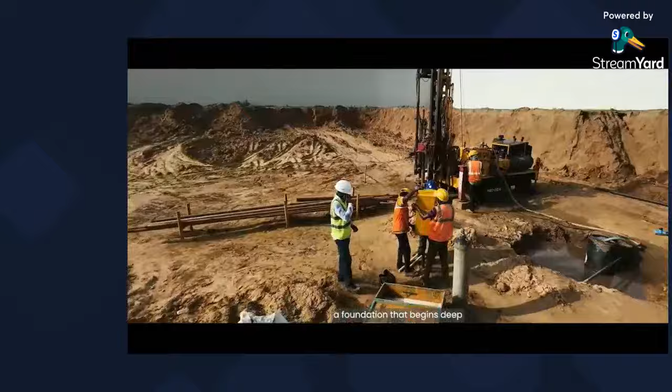Every metro line, every skyscraper, every bridge that connects lives rests on a silent foundation. A foundation that begins deep beneath the surface. And that's where we come in. Cengrs Geotechnica, smart geotechnics for better foundations.

Namaskar, my name is Sanjay Gupta. Right from 1971, I was employed in a job as a site engineer. Then I became a soil engineer, then senior engineer, and likewise. As a young, enthusiastic engineer with a passion in geotechnical engineering, I started as an entrepreneur and founded Cengrs, commonly known as Cengrs, that's Foundation Engineers. Cengrs is now 35 years young with a vision to make geotechnical practice a specialist engineering service. Cengrs has been instrumental in upgrading the codes of practice to improve geotechnical practice in society, with an effort to match international practices.

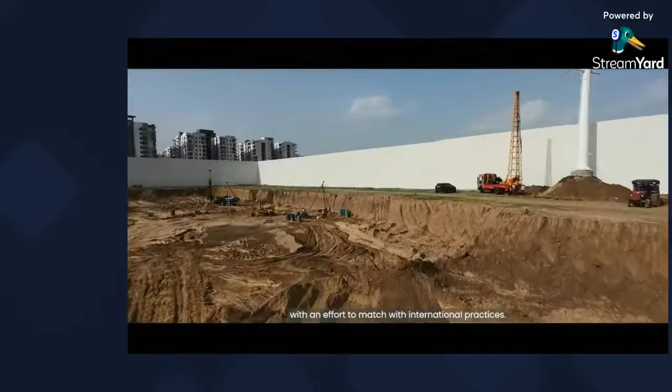Geotechnical engineering is a science, but its practice is an art. I always believe and say, be a part of the soil, feel the stresses, deform along with it, and the solution shall emerge within itself.

Cengrs was built on a commitment to generate authentic geotechnical data, maintaining technical integrity and a deep sense of purpose. Over 3.5 decades, we've partnered with India's most ambitious infrastructure projects, laying the groundwork, literally, working for a stronger tomorrow.

I'm Ravi Sundaram, Director of Cengrs Geotechnica Private Limited. At Cengrs, we are not just offering services, we are offering quality engineering. Our NABL accredited lab, our ISO certifications, our advanced testing equipment. From soil investigation to foundation testing, each step is backed by thorough and rigorous quality assurance so as to ensure the quality of data is trustworthy.

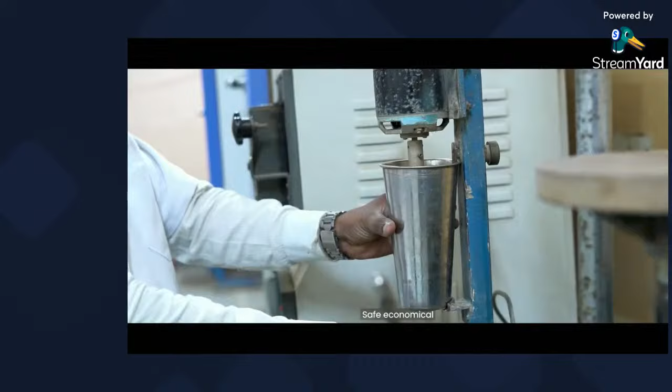Over the last 35 years, we have been building this trust with our clients and in professional circles. Be it a metro line, a smart city, or a high-rise, our detailed, data-driven approach ensures safe, economical, and sustainable construction. It's not just about what's underground, it's about what that foundation enables above the ground.

Behind every data point is a human being. Our people are the foundation of Cengrs. From seasoned engineers to young interns, every mind here is tuned to solve challenges and deliver value. We don't just work for our clients, we test today for tomorrow's progress. And as the nation progresses, we take pride in our contributions to the projects executed and our humble achievements.

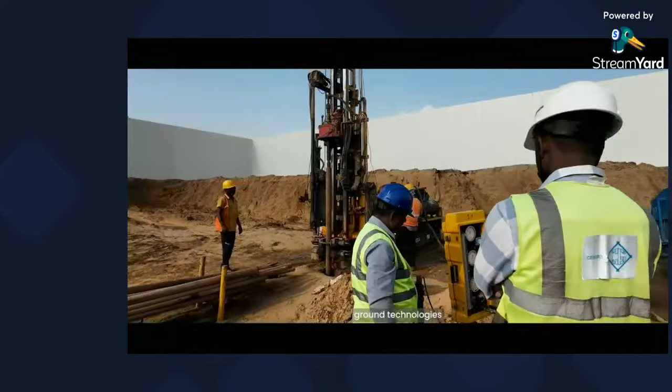Hello, I'm Saurabh Gupta, Director at Cengrs Geotechnica Private Limited. As the market leader, we have decided to transform the geotechnical engineering industry in India and bring it to world-class standards. To do this, we have implemented a system-driven approach so we can deliver consistent quality and on-time delivery for our customers. We are the first ones to bring in the latest ground technologies such as cone penetration test, pressure meter test, cross-hole seismic tests, etc., so we can unlock value and mitigate project risk. As always, smart geotechnics for better foundations.

From the surface, it's just soil. But to us, it's the beginning of possibility. Cengrs Geotechnica, smart geotechnics for better foundations.

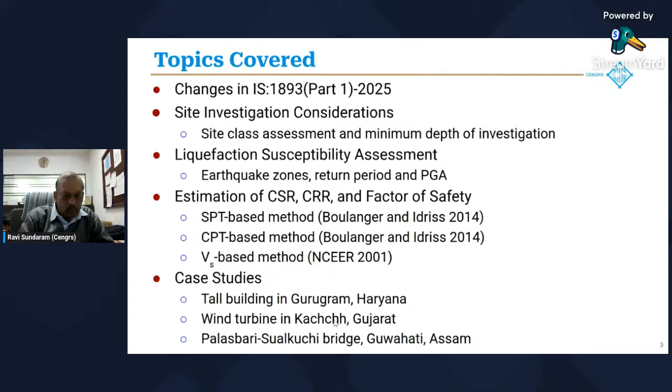I would start by introducing Cengrs to you. We have been in the field of geotechnical consultancy, investigations, and all since 1990. We have over 150 members team. We have over the years published over 85 papers, done up 200 to 250 projects annually, and we are close to 7,000 projects in the Indian subcontinent with over 1,500 satisfied customers.

So our primary activities include geotechnical investigation, geophysical surveys, geotechnical laboratory testing, engineering consultancy, topographic and hydrogeological surveys, foundation testing, etc. So our intent is to provide complete solutions, 360-degree solution as we call them.

So as a geotechnical investigation agency, we provide accurate data, reliable data for foundation analysis. We have in-house strength and capability for performing foundation analysis, as well as extensive experience to do these studies. Foundation testing, quality assurance, and quality control.

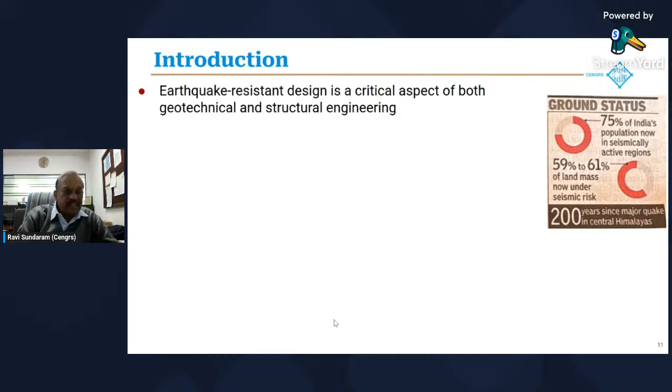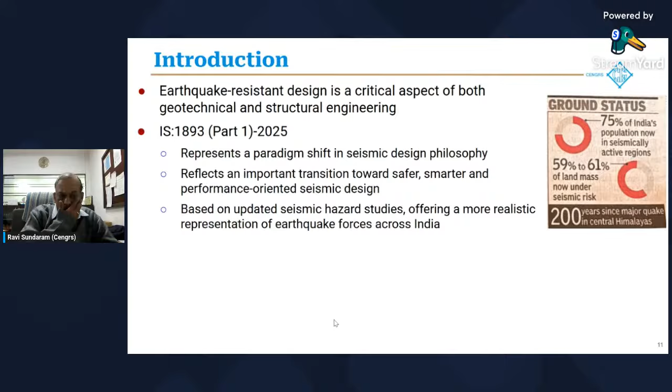It has been 200 years since any major earthquake has occurred in the central Himalayas. As a result, we have to be aware that there could be earthquakes anytime. So this code represents a paradigm shift in the seismic design philosophy. It reflects an important transition towards safer, smarter, and performance-oriented seismic design. So based on the updated seismic hazard studies, it offers a more realistic representation of the earthquake forces across India. It aligns India to the global practices and the practices which are used internationally.

So we can call this a responsible seismic design. Don't treat it as an over design. Sometimes people do tend to think that since the requirements have increased, so it is an over design. The intent is not to make everything stronger and safer, but to ensure that essential buildings remain functional even after major earthquakes. It adds an extra safety net, equipping buildings to better withstand the seismic events through strengthened provisions. So you can make sure that even if there is a major seismic event, your structure is better ready to function even after the major earthquakes.

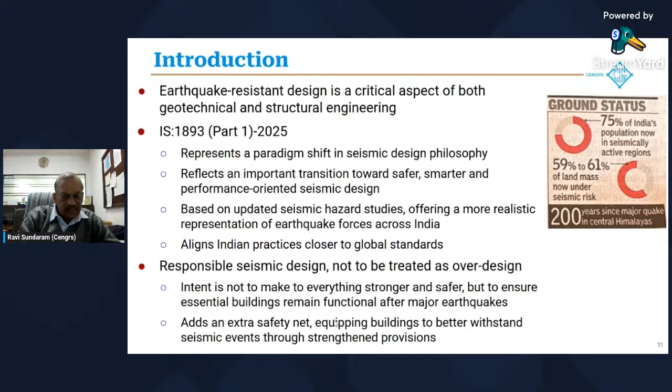So if we were to look at the key highlights, a new earthquake zone map has been released. This is a revised and more accurate seismic zone map, introduced using advanced probabilistic hazard assessment, PSHA as it is called. The minimum geotechnical investigation depth has been defined. It specifies that the minimum depth of investigation should be 2 times the width of the foundations for mats or raft foundations, spread footings, and as far as pile groups go, the length of the pile plus 2 times the width of the group.

So soil exploration must go deeper. A generic 10 or 15 meter deep boreholes won't suffice anymore. So investment in good geotechnical investigation is now important.

So the site classification is now based on VS, not on N values. SPT-based classification has been replaced by shear wave velocity classification. Sites are classified A to E. This means geophysical testing for shear wave velocity determination has become mandatory. You could do the shear wave velocity determination using seismic cone penetration test, cross-hole seismic test, or downhole seismic test. So this is now required.

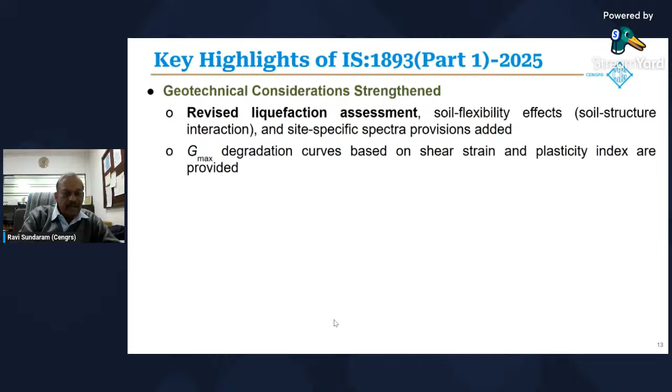Now geotechnical considerations have been strengthened. There is a revised liquefaction assessment, soil flexibility effects, that is the soil structure interaction, and site-specific spectra provisions. Now these have been added. The Gmax degradation curves based on shear strain and plasticity index are provided.

You have a requirement for site-specific earthquake hazard assessment. This should be done for the project site when your structures rest on site class A to D with design return period of 2,475 years, or in site class E for all cases.

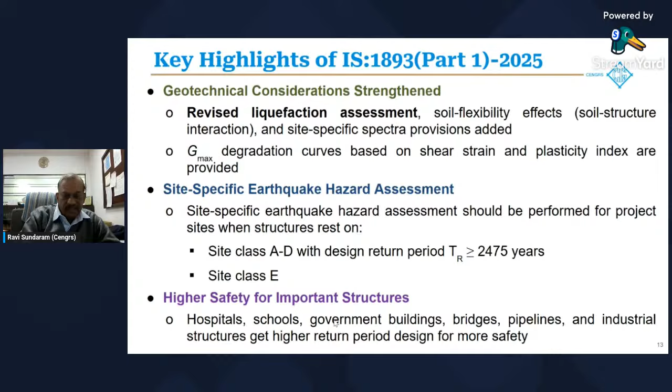And higher importance has been given, higher safety factor for important structures. So hospitals, schools, government buildings, bridges, pipelines, industrial structures get higher return period, so that it has to be designed more safely.

Let's make a comparison of 2016 code versus 2025. In 2016, shear wave velocity measurement was optional. Now it is mandatory for specific special critical structures in all earthquake zones and important structures in zone 4, 5, and 6.

The N60-VS correlation may be used only for normal structures in all earthquake zones and important structures in zones 2 and 3. Otherwise, you have to measure the shear wave velocity.

The site class assessment was based on a weighted average of the SPT values in the 2016 code. Now you have to take a weighted average of shear wave velocity within the depth of influence of the foundation, which is 2B below the foundation.

The 2016 code had 4 zones: 2, 3, 4, and 5. Now the zoning map has been updated to 5 zones with a new zone 6 being introduced.

The earthquake magnitude in the 2016 code does not directly specify what should be the magnitude of earthquake to be considered for each zone, whereas now we have very clear definitions. For zone 2, you use 6, for zone 3, you use 6.5, and so on, and for zone 6, you are going to use 8 on the Richter scale.

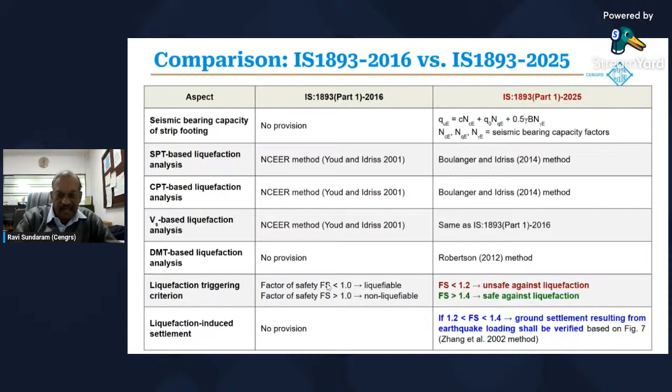The figure 7 of the new code is based on the Zhang et al. 2002 method, so this has to be done.

If we were to look at the site investigation considerations: for normal structures in earthquake zones 2 to 6, you can use corrected SPT values and VS profiles if available. For important structures in zones 2 and 3, you may use VS profiles if available, and they are preferred over the corrected N values. But in zones 4 to 6, you need VS from geophysical investigation.

Similarly, for critical and special structures, VS is required from geophysical investigations. A minimum depth of investigation, this is very important.

Now, the new code says that if B is the smaller plan dimension of the foundation, for mat foundations or raft foundations, your depth of investigation should be 2B below the foundation. For piles, if it's a single pile, it is depth of pile plus twice the diameter of the pile. If it's a pile group, which would normally be the case, then you must take the plan area of the pile group, the smaller dimension, and twice that dimension you have to investigate below the pile tip.

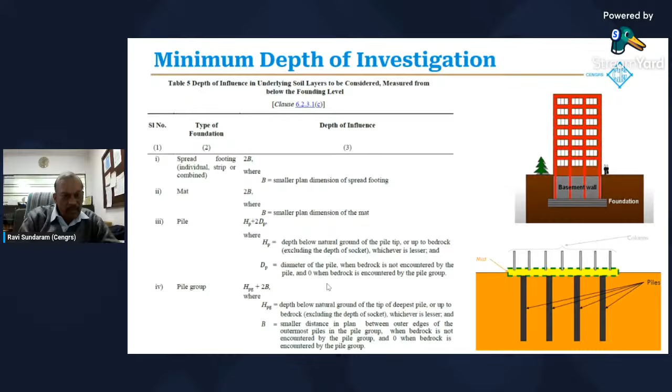So now your site class assessment. There is a correlation given in the code for computing VS on the basis of N values. But this, as I told you, you can use it only in zones 2 and 3, or for normal structures in zone 4 to 6. Otherwise, you must be doing the VS assessment.

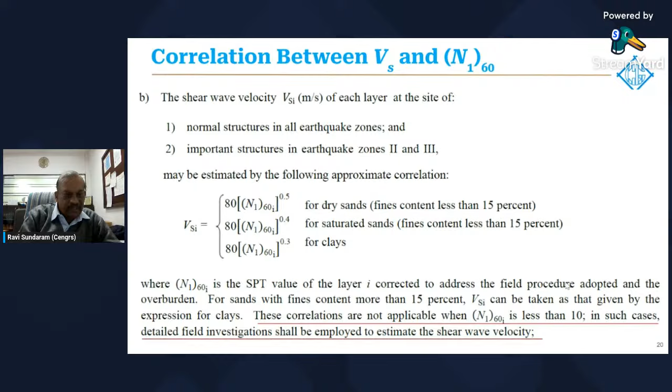The classification A, B, C, D, E is based on the shear wave velocity, which is given in this table. So approximate shear wave velocity you can estimate based on N values, but only under limited conditions. If you were to look at the equivalent N values for the various classes: site class A, you have N values more than 100, same for class B. For class C, dry sands, it is 20 to 100, more than 43 for saturated sands. Class D, you can have lower N values - dry sands 5 to 20 and saturated sands 8 to 43, and clays 15 to 100. But where the N values are less than 5 to 15, it would be class E soils. So the N60-derived VS is permitted only under limited conditions in zone 2 and 3.

Direct measurements of VS are always preferred, as explicitly stated in the code. The N60 to VS correlation is not applicable when N is less than 10. In such case, VS has to be measured. Unrealistically high N60 values for stiff to hard clays may be due to the empirical correlation, so be aware of that.

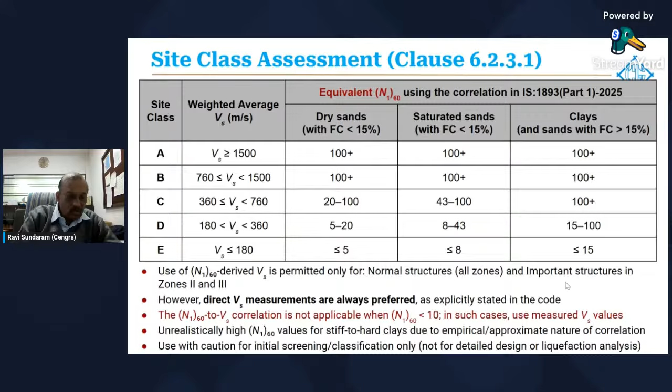There are also the non-invasive techniques like MASW, SASW, seismic refraction, passive surface waves, and various others like REMI and all that. Many of these are very much used in the country, and you may prefer, particularly for deep investigations, to do cross-hole seismic test. If you're not getting refusal, you could go with seismic cone penetration test. MASW, SASW, of course, they are very useful tests.

So just a brief look at cross-hole seismic test. So you have 3 boreholes, and in one borehole you create the impact, and the adjoining 2 boreholes you receive the waves. This way you are able to get a continuous profile of P wave velocity and shear wave velocities, and thus determine the various dynamic parameters. And then you can do your site class determination, your seismic analysis, static analysis, etc.

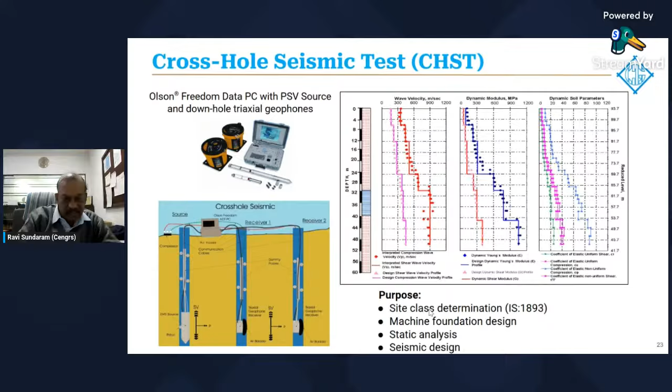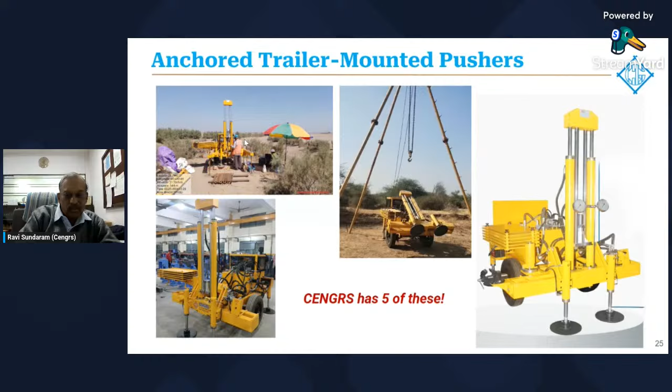So this is the equipment, the seismic cone penetration test pushers. We have been using this quite extensively. We have 5 of these rigs, and this is hydraulically operated, a trailer mounted rig. So the advantage is that it's quite fast. You can do 30 meters in just less than half an hour.

In granular soil, you get continuous and near continuous data, accurate, very reliable, enhanced, good quality data, with very good repeatability. It's versatile for the wide spectrum of CPT-based geotechnical parameters and for foundation analysis. In soft soils, you can even go up to 100 meters, but even in medium to stiff soils, you could probably go 40 meters or even more. It's very reliable, repetitive data, and irrespective of who does the test, you get similar results because it is digital data acquisition.

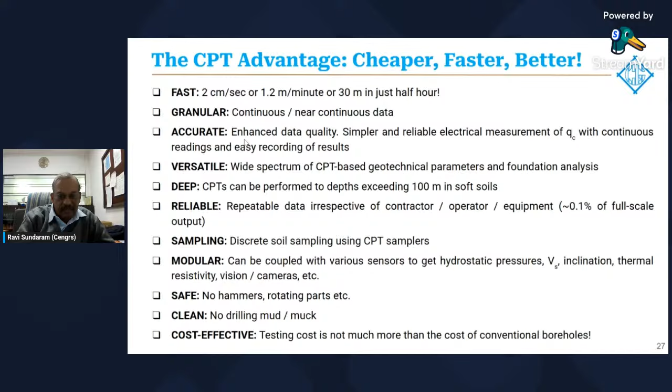You could do sampling with discrete soil sampling using CPT samplers, also called the MOSTAP sampler. It can be coupled with various sensors to get hydrostatic pressure, shear wave velocity, inclination, thermal resistivity, vision cameras, etc. No hammers or rotating parts. It's clean, no drilling mud. Cost effective. Testing is not much more expensive than conventional boreholes, so it's almost the same cost.

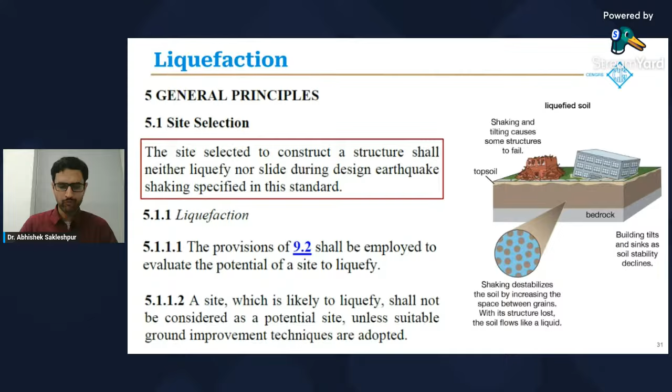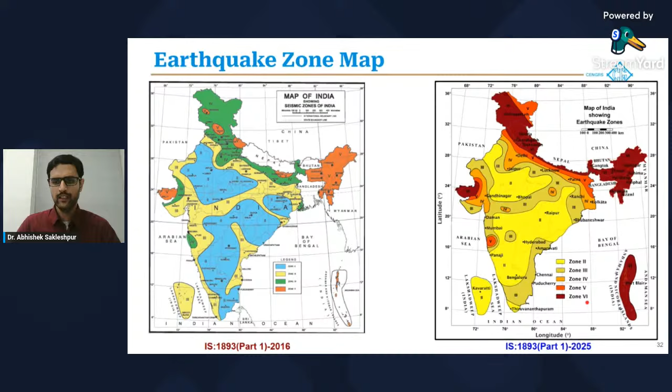Now, the states that fall in seismic zone 6 include Jammu and Kashmir, except the northeastern part of the state, Himachal Pradesh except the southern part, Uttarakhand, all the northeastern states - Sikkim, Arunachal Pradesh, Assam, Nagaland, Manipur, Mizoram, Tripura, Meghalaya - Western Gujarat, particularly Bhuj and Kutch, and finally the Andaman and Nicobar Islands.

So it's important to know the risk, be prepared, and stay safe. The way we can do that is by following updated building codes, conducting site assessments, earthquake preparedness, and community awareness and training.

Now, in terms of the earthquake magnitude on the Richter scale, for zone 2 it starts from a value of 6.0, increasing up to a magnitude of 8.0 for earthquake zone 6.

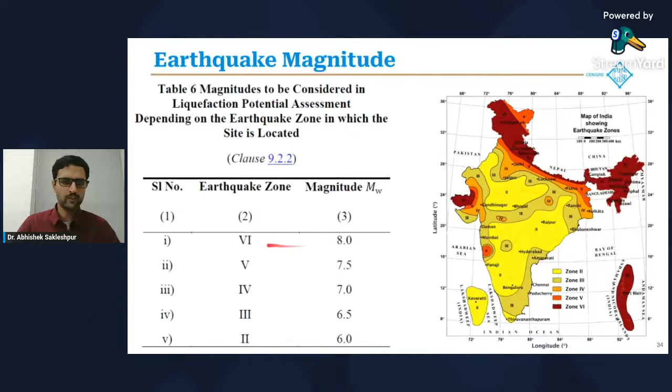When we do the liquefaction susceptibility assessment, one of the things we need to consider is the category of the structure. The IS code defines 4 categories of structures: normal structures, important structures, critical structures, and special structures. This classification depends on the relative severity of the negative consequences - that is, loss of life and livestock, loss of property, and harm to the natural environment - in the event of failure of the structure.

Apart from IS 1893 Part 1, there are other parts going from Part 2 to Part 11, and each of these parts focuses on different types of structures, such as liquid retaining structures, bridges, industrial structures, buildings, base isolated buildings, long distance pipelines, steel towers, coastal structures, tunnels, and earthen embankments and earth retaining structures.

Now, in order to determine the peak ground acceleration, we need to know what is the design return period. In the new IS code, there are 2 tables to estimate the design return period.

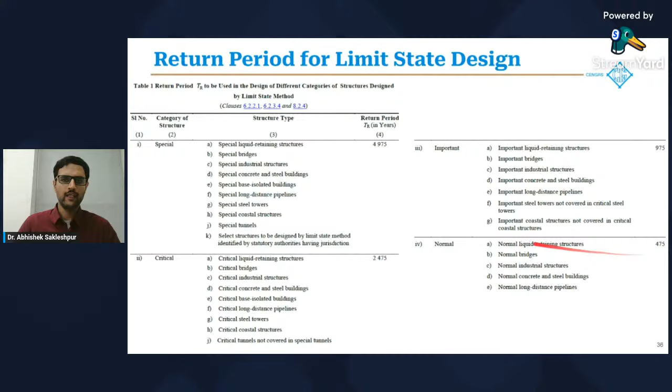Table 1 that you see on the slide here is the return period to be used in the design of different categories of structures that are designed by the limit state method. You can see in the table, depending on whether it's a special structure going all the way down to a normal structure, the design return period is different. So for a normal structure, it's 475 years, and as you go to a special structure, the design return period increases to 4,975 years.

Table number 2 is for the design of different categories of structures by the working stress method. The return periods in this table are lower compared to the limit state method, ranging from 175 years for normal structures up to 975 years for special structures.

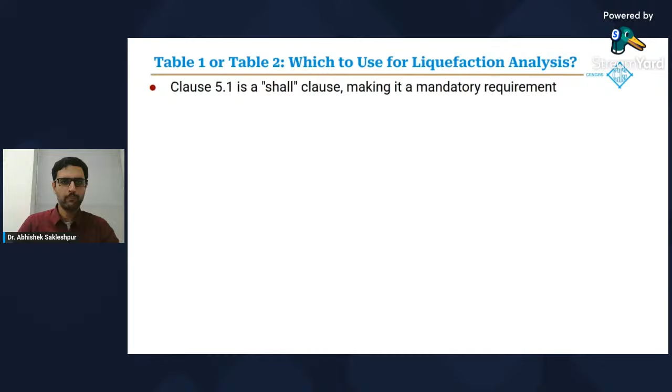A question that often comes up is which table should we use for liquefaction analysis - table 1 or table 2? If we refer back to clause 5.1 that you saw earlier, this clause is a 'shall' clause, making it a mandatory requirement. To repeat that clause, it says that the site shall neither liquefy nor slide during the design earthquake shaking. What that means is basically the structure must not collapse under the design ground shaking.

Now, if we choose to use table 2 for liquefaction susceptibility analysis, there is an incompatibility because although the code directs working stress method designers to table 2 for structural design and structural member proportioning, for liquefaction analysis the higher hazard levels in table 1 should be prioritized. This is because liquefaction is a geotechnical ultimate limit state that leads to collapse of the entire structure, and a site may pass table 2 shaking but could liquefy under the return periods in table 1, which would violate clause 5.1.

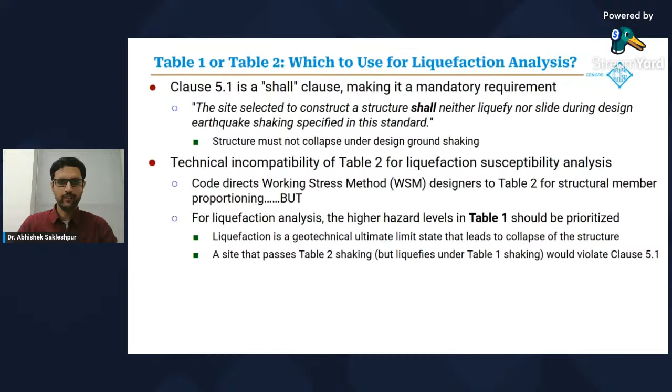So what is your way forward? Use your table 1 return periods, which represent the 475 year to the 4,975 year collapse prevention level, so that the site will remain stable under the intensity of the design earthquake shaking. The site will be robust enough to handle the design level shaking, regardless of whether the superstructure is designed using working stress method or limit state method.

So to summarize: for working stress method structural design, use table 2 to get the design return periods. For limit state method design of structures and liquefaction susceptibility assessment, use the return periods given in table 1. By doing so, we ensure that we do not violate the mandatory 'shall not liquefy' provision of clause 5.1, making our design fully consistent with the safety objectives of the IS 1893 (Part 1)-2025 code.

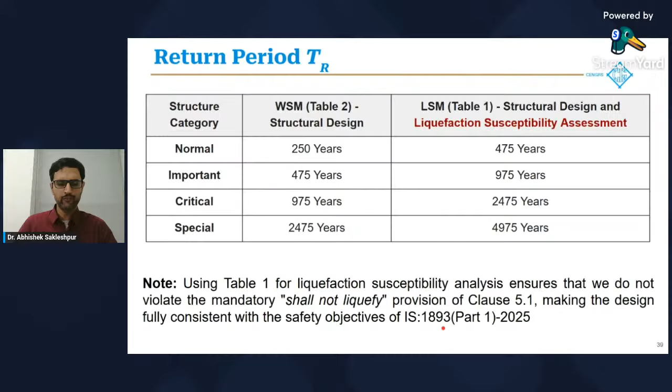So let's look at a few cases. If we take buildings, for example, buildings have a separate part, which is part 5 of the IS 1893 code. Nowadays in India we see a lot of tall buildings and high-rise residential towers coming up. Residential or commercial buildings with occupancy more than 100 people, or tall buildings, are classified as important buildings according to part 5 of the IS 1893 code. The design return period for liquefaction susceptibility analysis is 975 years.

Similarly, for bridges, which are covered in part 3 of the IS 1893 code, a river bridge or flyover bridges inside cities, or bridges on national and state highways, fall under the category of important bridges. However, if you have a long bridge more than 1 kilometer in length across perennial rivers and creeks, or bridges for which alternative routes are not available, these are classified as critical bridges according to the IS code. So we choose the design return period accordingly.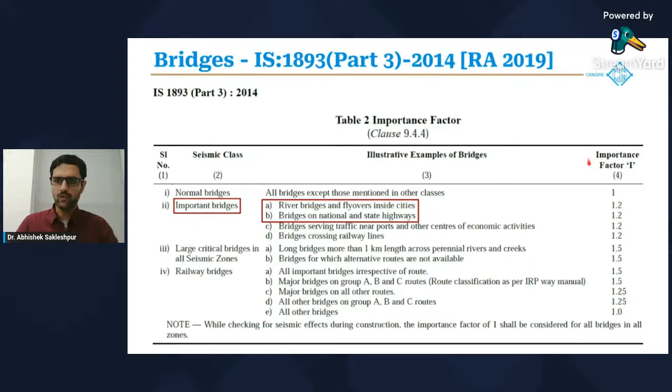Now in this table, you can also see a column with the importance factor. So what is this importance factor? It's important to note that the importance factor is not used to calculate the PGA for liquefaction susceptibility analysis. This importance factor is a structural parameter used to determine the design earthquake force for the structural elements themselves.

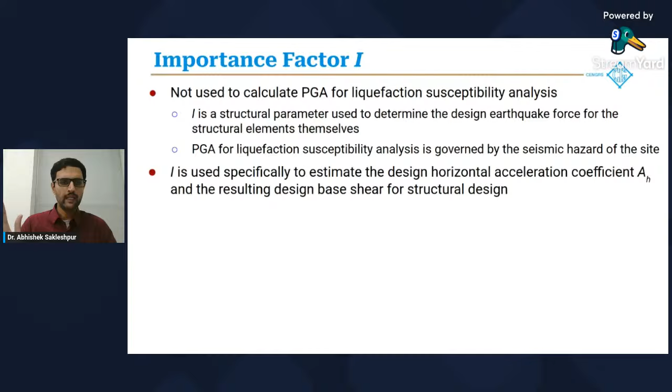Whereas the PGA for liquefaction susceptibility analysis is governed by the seismic hazard of the site, the importance factor I is used specifically to estimate the design horizontal acceleration coefficient and the resulting design base shear for structural design. It accounts for the functional use of the structure and the consequences of its failure. For example, lifeline infrastructure such as hospitals or major bridges require higher design forces, and they are given a higher importance factor.

So to summarize, for liquefaction analysis the primary seismic parameter is the peak ground acceleration, which is based on the zone factor for a specific design return period TR, and the importance factor is not used here. Whereas for structural design, the primary seismic parameter is the design base shear, which depends on the zone factor, the importance factor, and a response reduction factor R.

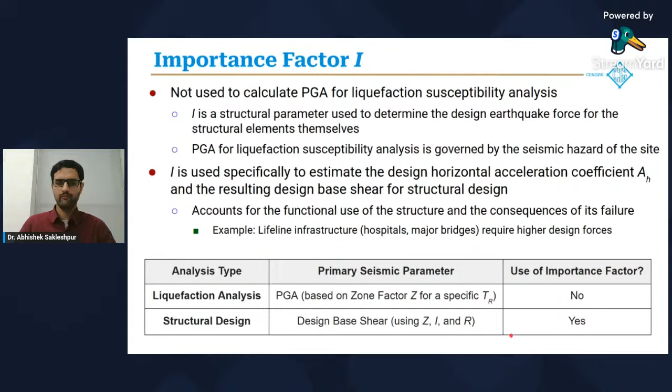So once you know the earthquake zone, that is zone 2 to zone 6, and your design return period, we can use table 3 of the IS code to obtain the peak ground acceleration. As an example, if we are in Delhi NCR, which falls under earthquake zone 4, and we take a tall building with a design return period of 975 years, then the peak ground acceleration is 0.28 g.

This table summarizes the earthquake magnitudes and PGA for a few select cities in India. If we look at Chennai, for example, in the 2016 code, it was in zone 3 with magnitude 6.5, PGA 0.16g. In the 2025 code, it falls in the same zone, same earthquake magnitude, but the PGA ranges from 0.13 to 0.33, depending on the design return period.

Kolkata, on the other hand, has been upgraded from zone 3 to zone 4 in the new IS code, and so the PGA values are also higher. Delhi NCR remains in zone 4 in the new IS code, with PGA values depending on the design return period. Now, the new zone 6 that we saw earlier includes Bhuj and Guwahati, which now have much higher design earthquake magnitudes and higher values of PGA, depending on the return period.

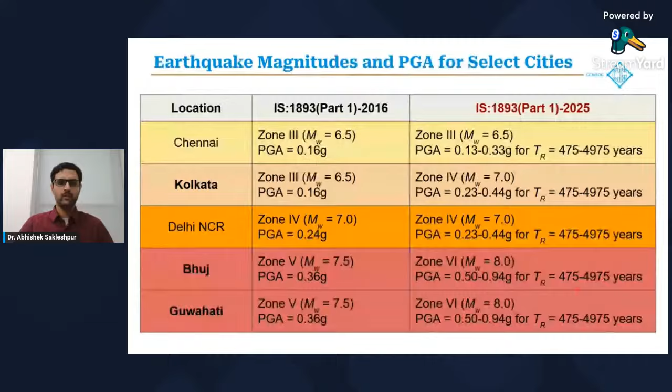So let's move to estimation of cyclic stress ratio, CSR, and factor of safety. I'll briefly go over the following slides in the interest of time, but the equations are extensively covered in the IS code. Cyclic stress ratio represents the seismic demand, and it depends on the peak ground acceleration, the vertical in situ total and effective stresses, and the stress reduction coefficient RD. The stress reduction coefficient takes into account the earthquake magnitude M.

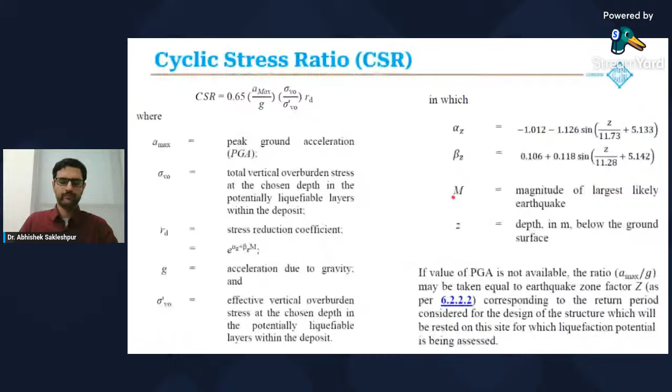Now, once you have the cyclic stress ratio, we then need to estimate the cyclic resistance ratio, which represents the resistance to liquefaction. CRR is equal to the value of CRR for a 7.5 magnitude earthquake under a vertical effective stress of 100 kPa, multiplied by the magnitude scaling factor and K-sigma, which is an overburden stress correction factor. Depending on whether we use the standard penetration test SPT, the cone penetration test CPTu, or shear wave velocity, we estimate the CRR for a 7.5 magnitude earthquake.

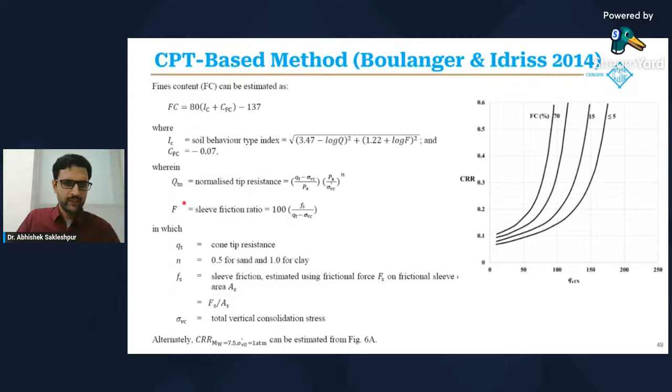The equation to calculate the fines content is given here at the top of the slide. This equation for the fines content has the soil behavior type index IC, which depends on your normalized cone resistance and the normalized friction ratio. It also has a fitting parameter CFC, and the IS code suggests a default value of minus 0.07 for this parameter. The other equations on the slide are for the normalized cone resistance and the normalized friction ratio.

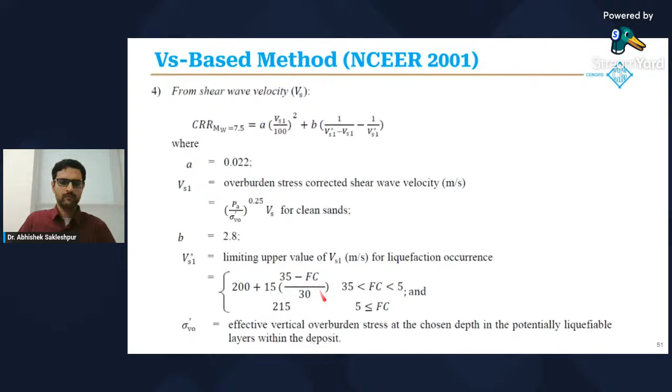Now, the factor of safety against liquefaction is the ratio of CRR to the CSR. As Ravi sir mentioned previously, if the factor of safety against liquefaction is less than 1.2, the soil layer shall be considered unsafe against liquefaction. If it's more than 1.4, the soil layer may be considered safe. Between 1.2 and 1.4, the resulting liquefaction-induced settlement should be verified based on figure 7 of the IS code.

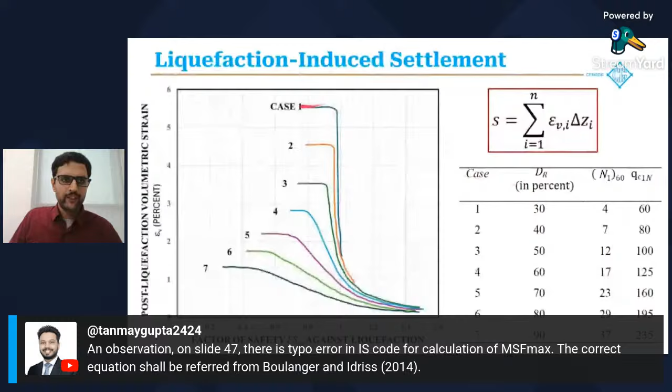Case number 1 would lead to higher post-liquefaction volumetric strains as expected, and as you go down to case number 7, you have lower post-liquefaction volumetric strain. Once you get the epsilon V, you have to multiply that with the thickness of the soil layer, and if you then take the summation of this across the zone of influence of the foundation, you then get the total liquefaction-induced settlement.

So let's look at 3 case studies to illustrate the application of the provisions in the new IS code.

The first case study is a tall building in Gurgaon, Haryana. This tall building includes 3 high-end towers, which are 140 meters in height. Each tower has 4 basements for parking and associated services. In addition to the 3 high-end towers, we have 4 low-rise blocks with 4 basements and 7 floors each.

The plot area is approximately 10 acres, and you can see an architect's visualization of the towers in the figure here. The scope of work in this project included 9 boreholes to 65-meter depth, 8 boreholes to 35-meter depth, 3 SPT analyzer tests for SPT energy measurement, 18 CPTUs to 30-meter depth, 3 seismic cone penetration tests to 30-meter depth, and also pressure meter tests in 3 boreholes to 65-meter depth. This would represent what we call a gold-level geotechnical investigation for accurate site characterization and enhanced liquefaction susceptibility assessment and foundation design.

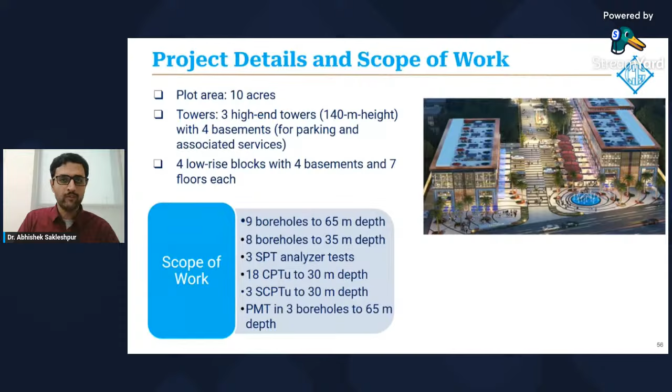This is a plan of the field investigation. You can see the 3 towers here in plan view and the layout of the boreholes, CPTUs, seismic CPTUs, and pressure meter tests. On the right-hand side are a few photographs of the field work in progress. For this presentation, we'll focus on tower number 3.

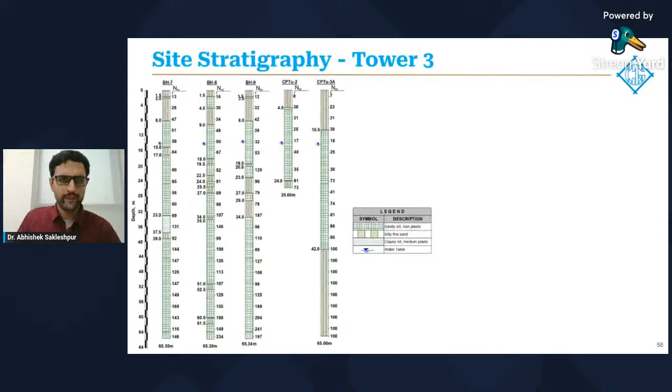Here we can see the summary profiles of the site from boreholes and CPTu interpreted soil profiles. Basically the soil profile consists of silty fine sand from the existing ground level to about 7.5 meter depth. This is underlain by sandy silt of low plasticity to the final explored depth of 65 meters. Groundwater was met at a depth of about 13 to 14 meters at the time of the field investigation.

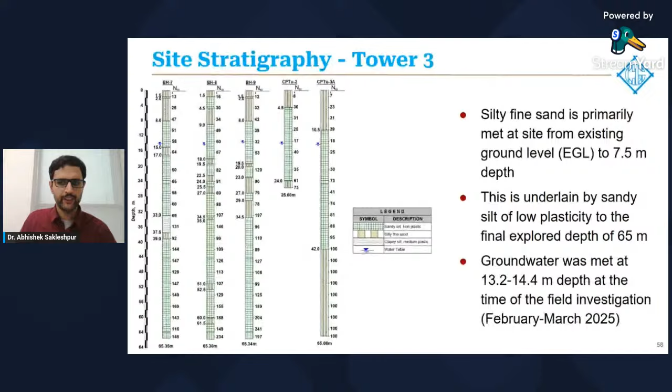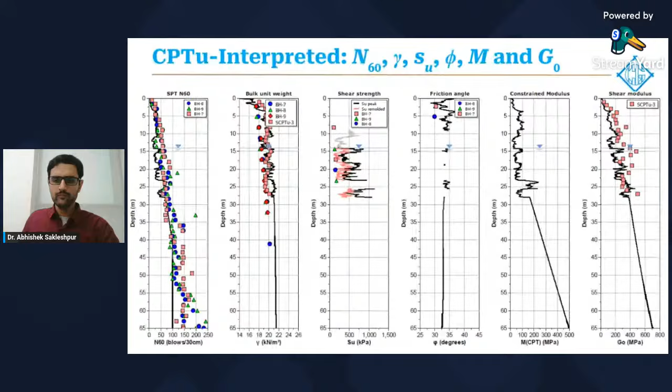It indicates the presence of natural cementation or microstructure in the soil profile. And this is a direct consequence of the higher values of shear wave velocity that we obtained from the seismic cone penetration test compared to CPT interpreted correlations.

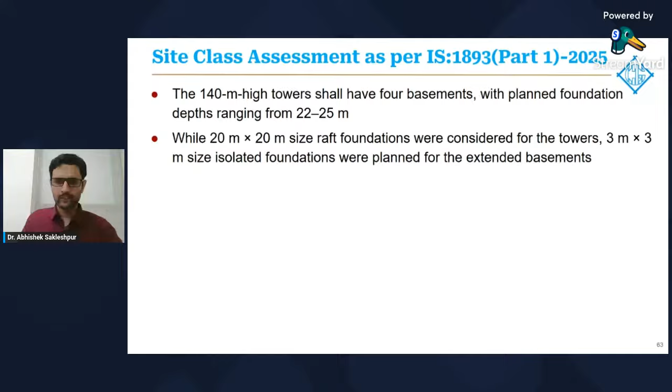So based on this weighted average shear wave velocity, the soil at the site is classified as site class C, according to table 4 of the IS 1893 code.

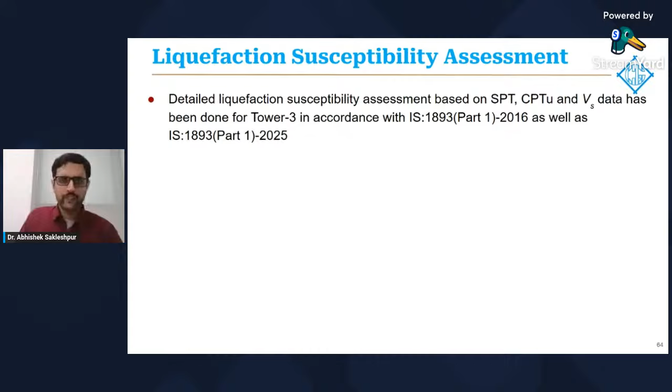Liquefaction susceptibility assessment: we had done detailed liquefaction susceptibility assessment using CPT, SPT, and VS data. The groundwater level during our investigation was actually influenced by dewatering.

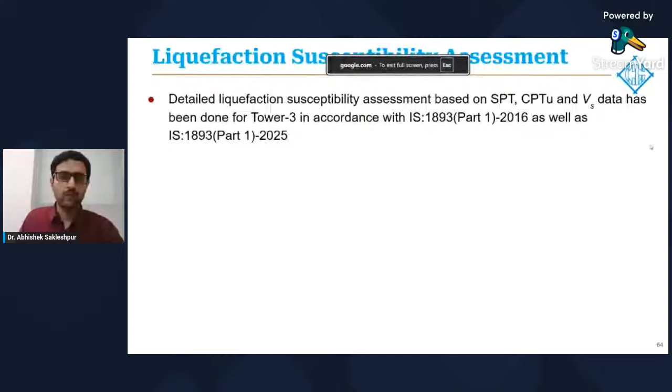Yes, okay, let's continue. So the project site falls in zone 4 with a design earthquake magnitude of 7.0. And according to table 1 of IS 1893 part 5, tall buildings are classified as important buildings.

So important buildings that fall in zone 4 are assigned a design return period of 975 years, which corresponds to a PGA of 0.28 G.

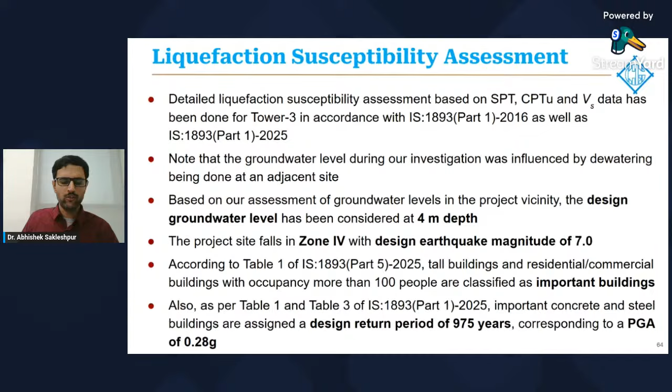With this information, we did the liquefaction susceptibility assessment using the IS 1893 Part 1 2016 as well as IS 1893 Part 1 2025.

In the IS 1893-2016 code, the earthquake magnitude is 7, PGA is 0.24 G for zone 4, and factor of safety against liquefaction is equal to 1.

And we found that based on SPT, CPTu, and shear wave velocity, there was no liquefaction potential at the site.

The new IS code with a PGA of 0.28 G and a factor of safety of 1.2 for liquefaction triggering criterion also indicates no liquefaction potential for the SPT and the shear wave velocity based methods.

For the CPTu based method, what we found is when we use the correlation to calculate the fines content, it's predicting liquefaction susceptibility between 4 to 10.5 meter depth, indicating a liquefaction potential index of 9.7 and a high risk of liquefaction.

But when we used the actual measured fines content from the boreholes and laboratory grain size analysis, we found that the liquefaction susceptibility at the site was now much lower, with a lower LPI value and low risk of liquefaction, indicating better agreement with the SPT and the shear wave velocity methods.

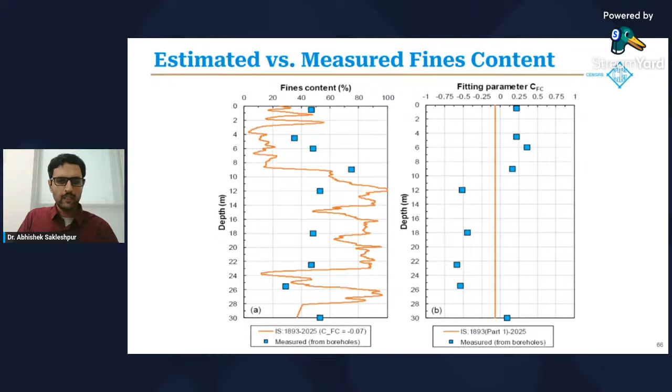So what this indicates is that sometimes site-specific calibration of this fitting parameter may be required to get realistic assessments of liquefaction susceptibility.

So quickly, the key takeaways. According to IS 2016, for zone 4 with these input parameters, there is no liquefaction potential according to SPT, CPT, and shear wave velocity. In the 2025 code, for zone 4 with similar parameters but slightly higher PGA, the factor of safety against liquefaction is now upgraded to 1.2.

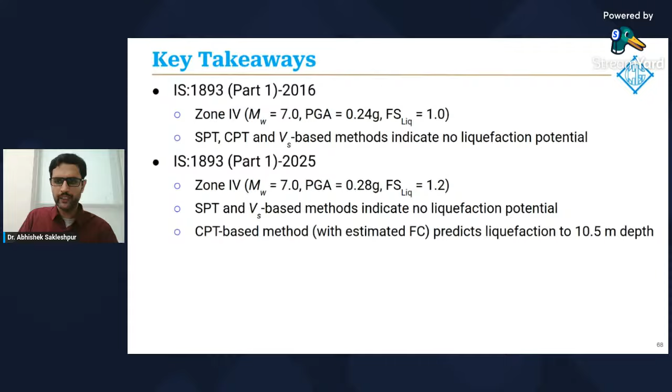SPT N values show no liquefaction potential. The CPT-based method with estimated fines content predicts liquefaction to 10.5 meter depth. But when we use the actual fines content, the CPT-based method also indicated no liquefaction potential.

So the key takeaway is that the CPT-based method in the new IS code is sensitive to the fines content, which is something we have to keep in mind. Site-specific calibration of the fitting parameter may be required on a project-by-project basis, and the default value of minus 0.07 suggested in the IS code may not suffice for all cases.

Moving to case study number 2, which is a wind turbine in Kachchh, Gujarat. I'll quickly go through this slide. As we know, wind energy is a national priority in India, and we want to expand our renewable energy goals. This includes the construction of onshore wind turbines in different parts of India.

Key turbine specifications: 5.2 megawatts of electricity per turbine, rotor diameter of 160 meters, and a tip height of 200 meters.

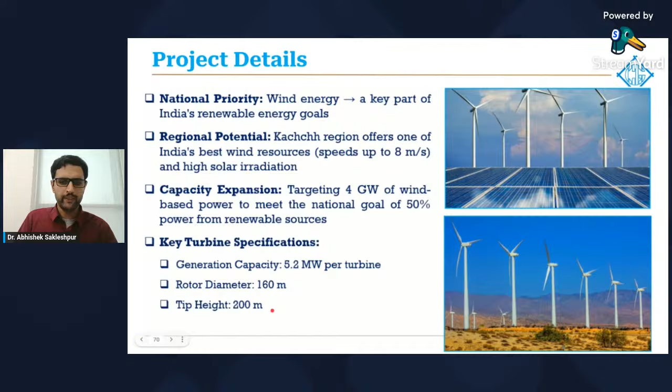The scope of work in Kachchh, Gujarat included 300 plus wind turbine generators. At each wind turbine, the scope included one borehole, one cross-hole seismic test, and one CPTu, all to 25-meter depth.

Site stratigraphy shows a reasonable match between the stratigraphy from borehole data as well as the CPTu interpreted stratigraphy, with minor variations in layer thickness.

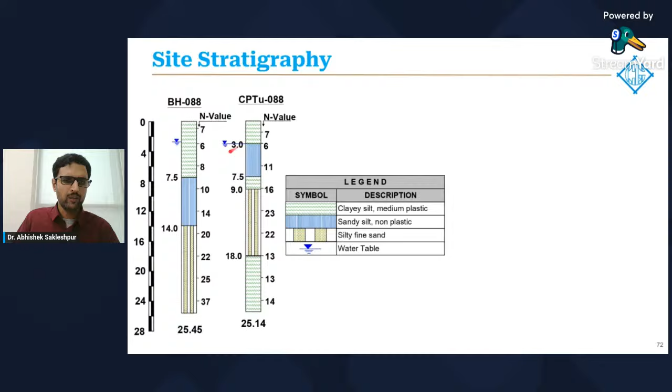The upper stratum from the ground surface to about 7.5 meters consists of medium stiff clayey silt with low SPT N values. That is underlain by non-plastic loose to medium dense sandy silt to 14-meter depth, which is subsequently underlain by medium dense to dense silty sand to 25-meter depth, with increasing SPT N values with depth.

Groundwater was encountered at a depth of 3 meters, so a shallow water level at this site.

In terms of gradation and plasticity, the upper half of the soil profile shows higher fines content, with the presence of 20 to 25% clay, liquid limit of about 35 to 40%, plasticity index of 20%, and water content close to the plastic limit.

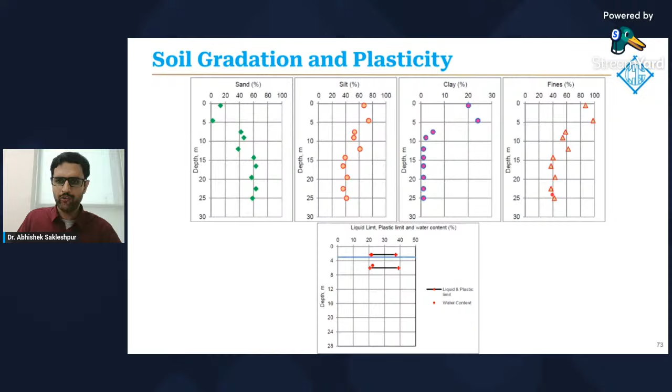As we go deeper in the soil profile, the clay percentage drops to practically zero, resulting in a decrease in fines content and an increase in sand percentage.

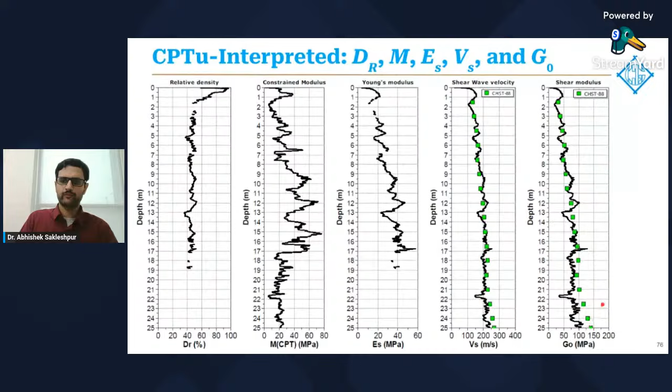For the liquefaction susceptibility assessment, this project falls in earthquake zone 6 as per the new IS code, with magnitude 8.0. Given that onshore wind turbines are critical energy generation infrastructure whose failure can cause economic loss and power grid disruption, these structures are classified as important industrial structures as per Part 4 of IS 1893.

So for important structures in earthquake zone 6, the design return period is 975 years with a PGA of 0.6G. So with this input data, we did the liquefaction susceptibility assessment using SPT.

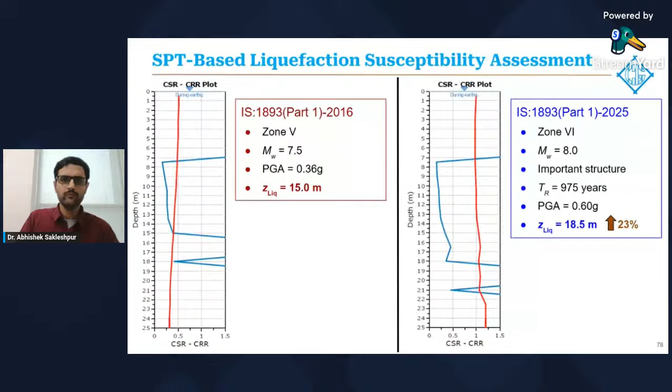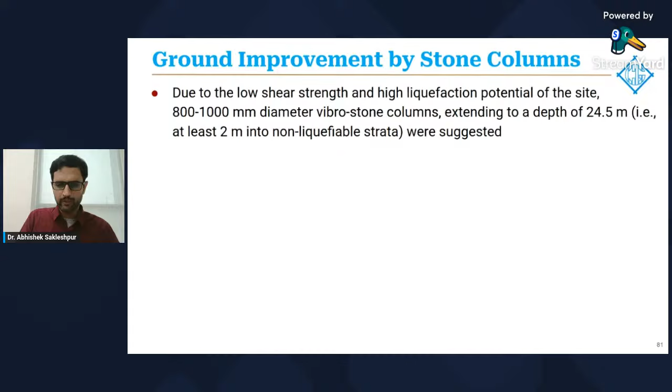Considering the liquefaction analysis, we suggested ground improvement by stone columns—800 to 1000 millimeter diameter vibro stone columns extending to about 24.5 meter depth, at least 2 meters into non-liquefiable strata, with a triangular installation grid and column spacing of about 2 to 3.5 meters, supplemented by peripheral rows of columns for lateral confinement.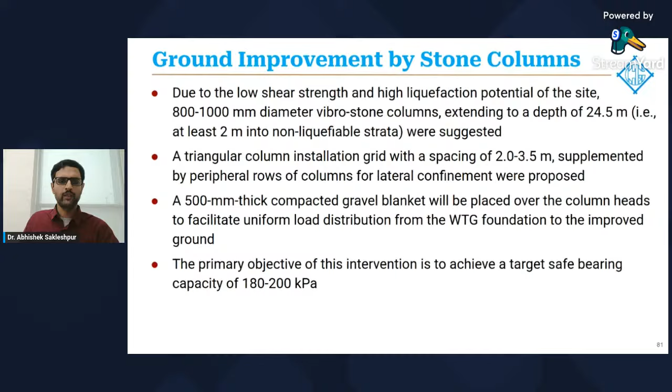A 500 millimeter thick compacted gravel blanket was suggested over the column heads to distribute the load uniformly from the WTG foundation to the improved ground. The primary objective was to achieve a target safe bearing capacity of 180 to 200 kPa. To verify effectiveness of the ground improvement, we suggested post-GI CPTu soundings 20 to 25 days after installation of the stone columns.

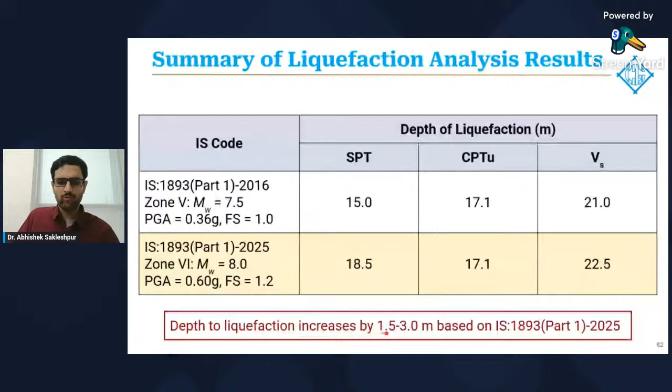Summarizing the liquefaction analysis results: based on IS 1893-2016 code, using SPT, the depth to liquefaction is of the order of 15 to 21 meters across the three methods. With the new IS code and enhanced earthquake magnitude and PGA values, the depth to liquefaction increases by 1.5 to 3 meters.

Another finding in this project was the significant time savings achieved using CPTUs compared to boreholes. For the total number of wind turbines, 263 numbers, the total running meters of investigation was 6,575 meters. Taking 5 SPT drill rigs and 5 CPTU rigs, with an average productivity of 10 running meters per rig per day for boreholes, or 2 CPTUs per day.

The estimated time duration for planning and mobilization was 15 days for boreholes compared to just 7 days for CPTu. Testing, including sampling and laboratory testing for boreholes, was significantly higher at 161 days compared to only 26 days for CPTu. Preparation and submission of the draft final report was also much faster with CPTu. The overall saving in time achieved by using CPTu was almost 80%, at a lower cost compared to boreholes.

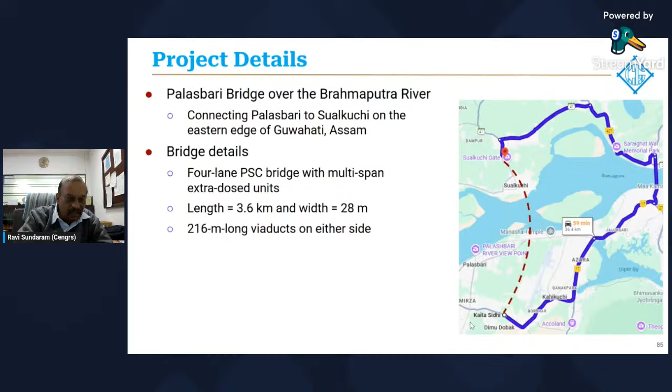So the bridge details here: this is a 4-lane PSC bridge with multi-span extradosed units. Length is 3.6 kilometers with a width of 28 meters, with 216-meter long viaducts on either side and an 864-meter long wetland viaduct. The total project length is 12.2 kilometers.

It starts on NH17 from Kaita Sidhi on the south bank and crosses the Brahmaputra, terminating at Bongasor Sualkuchi Road on the north bank. So this is the north bank here and this is the south bank.

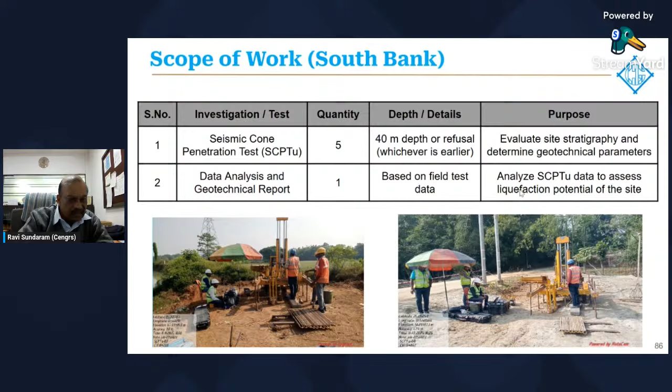So the scope of work: we did 5 seismic cone penetration tests along the alignment to 40-meter depth to evaluate the stratigraphy and determine the geotechnical parameters. The geotechnical analysis and report was based on the field data of the boreholes and the SCPT seismic cone data. You can see the test being done along this alignment.

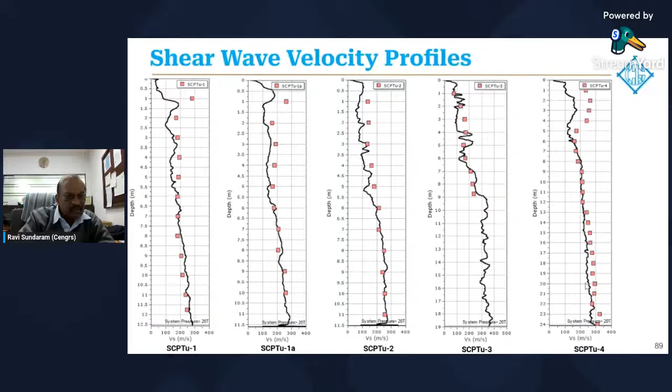So the shear wave velocities measured from the seismic cone penetration test are compared here with the shear wave velocity interpreted from the CPT data itself. The solid line is what was calculated using Robertson's correlations for shear wave velocity. You can see there is a very good match with the data of the seismic cone, which is done at every 1 meter depth.

So the liquefaction susceptibility assessment here, because the project site falls in earthquake zone 6, so magnitude 8.0. It's a critical bridge because it is more than 1 kilometer length, and Brahmaputra, as you know, is a perennial river, and alternate routes are not easily available, although there is a long alternate route available.

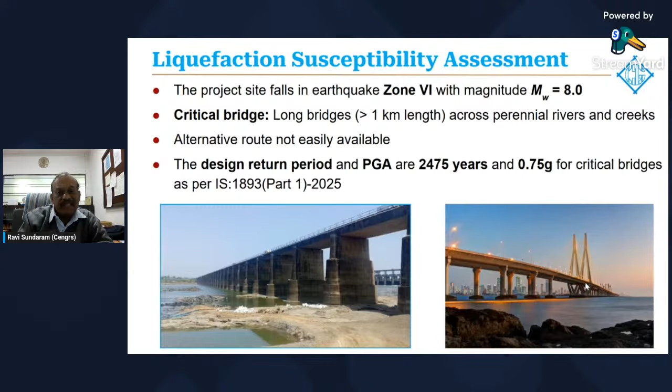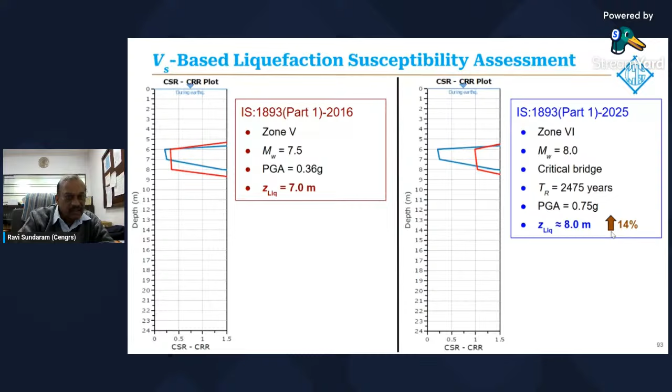This is just physically, graphically plotted results of the CSR and CRR. The VS-based liquefaction analysis shows it increases from 7 meters to 8 meters. So that was based on the CPT, and this is based on the VS. So there's a 14% increase.

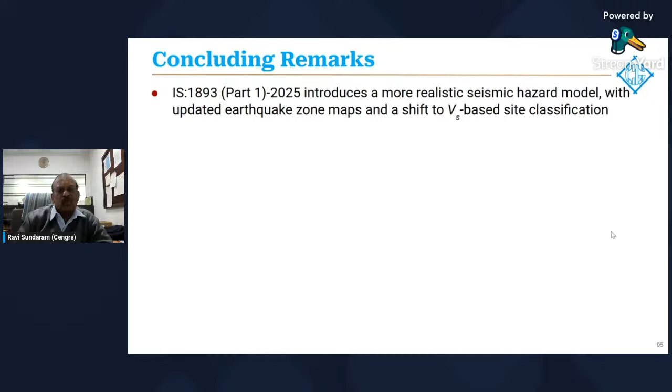So with this, I come to the conclusion of this presentation. IS 1893-2025 introduces a more realistic seismic hazard model with updated earthquake zone maps and a shift to VS-based site classification. Geophysical testing for shear wave velocity is now mandatory for site class determination, especially for critical and important structures. Liquefaction analysis uses design earthquake shaking and higher return periods to ensure site stability, emphasizing a responsible seismic design.

Seismic safety is now very important, and particularly for important structures, the seismic safety assessment has been increased, particularly hospitals, bridges, etc. They now have higher return periods and associated PGA values. So the liquefaction susceptibility assessment is now aligned to modern methods such as Boulanger and Idriss 2014, SPT and CPT-based approach and VS method.

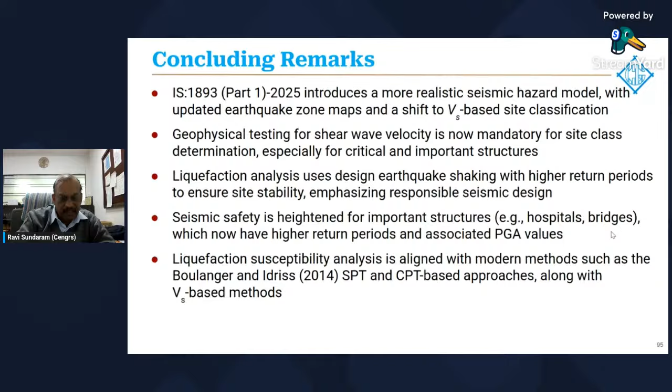So we presented 3 cases from Gurgaon, Kutch and Guwahati to demonstrate the applicability of the code for liquefaction susceptibility. You can see in each of the cases there are substantial implications, and we have to be very careful in interpreting the depth of liquefaction.

There is a government notification which says that the new code has been implemented from 3rd November, but to facilitate designers, the earlier code can continue to be used up to 3rd May 2026. So it gives you a 6-month window to transition. That is the impact of the code.

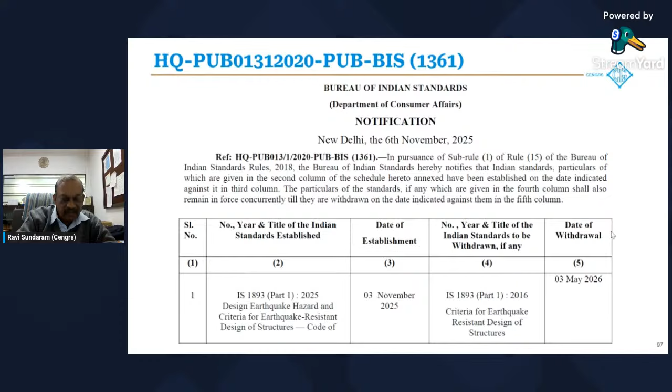So designers who can complete their design well before the planned date may use the old code, but then must be aware that the new code is more responsive to seismic events. Thank you very much.